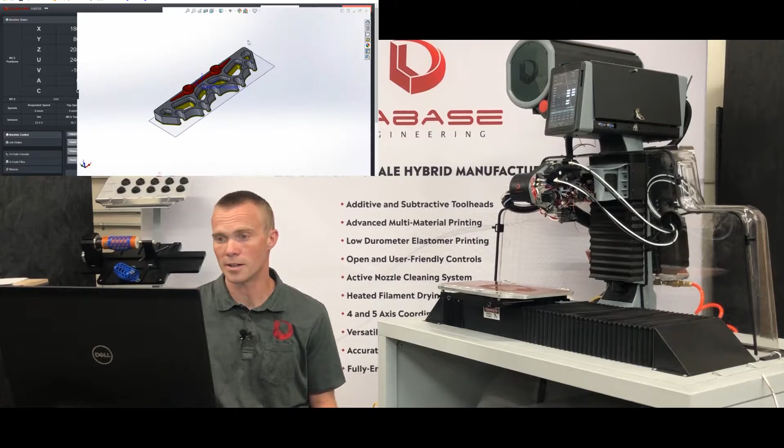So the machine's ready to go, but before we just load a multi-material print and hit go, there's a whole lot we have to talk about, starting with our software toolchain. So generally, we're going to have our part in our modeling software. This is our normal starting point for really any build.

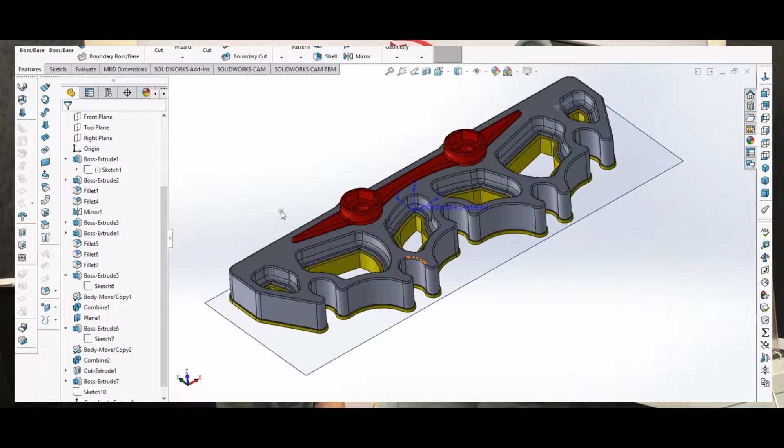So for this video, this is our end goal, to print this multi-material part. And this is just a flange that holds the arrows in my quiver. The old part was a little worn out and dry rotted, so I thought I'd print a new one and make use of it as an example build for this video.

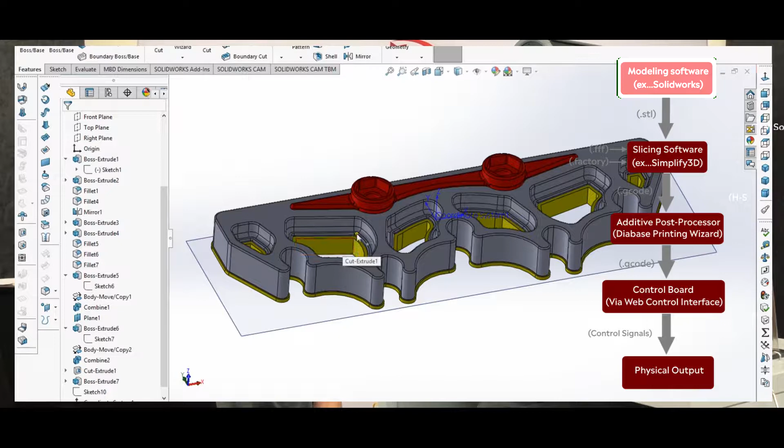So it's a 3-material print, but before we dive into the details here, let's just talk about the process that we're going to go through in order to get from this model to a physical object in our hand. So we're starting off here in the modeling software, and this is where we're going to define our coordinate system for the build, but it's also where we're going to define how the differing materials mate with each other and how they interface, whether they're just coincident or whether there's some overlap.

So we define our model geometry here, and then we'll export an STL into our slicing software. So in this case, Simplify3D, and I don't have the model in yet. We'll walk through that process. But this is where we're going to define most of the

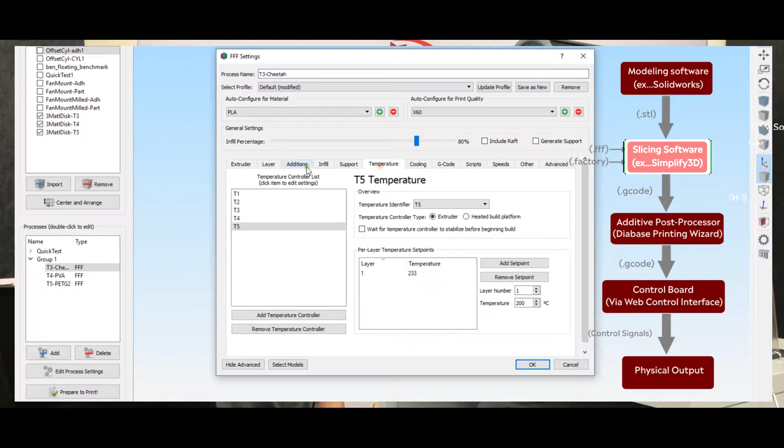parameters of our process. So everything from our nozzle diameter to our extrusion width, our temperatures, our layer heights, the scripts, these custom scripts that we send to the machine in order to get it to do some special things that we want. Our speeds, all of these things will be done in the slicing software, and then from there we'll export our G-code and then go to our post-processor.

So this is the Diabase printing wizard, and this is a piece of software that just combs through that G-code and makes some changes to it that are specific to the needs of the H-Series machine. And it also gives us a few more knobs to turn, a few more parameters that we can change that Simplify doesn't allow. So from here, we'll process the file, output another G-code file, and then send that to our machine. But we're not done at that point.

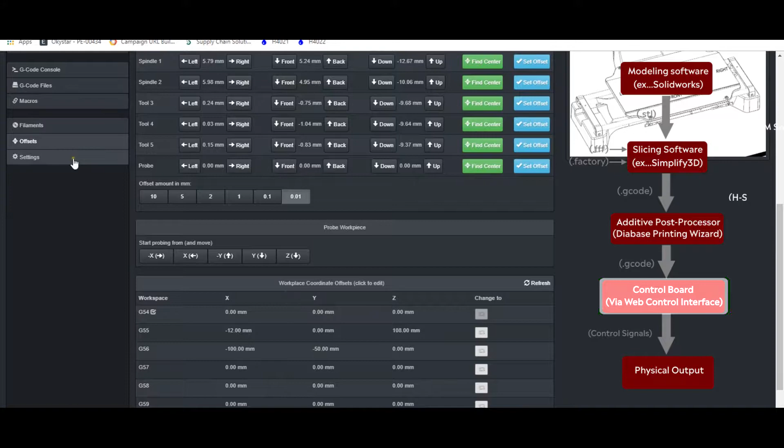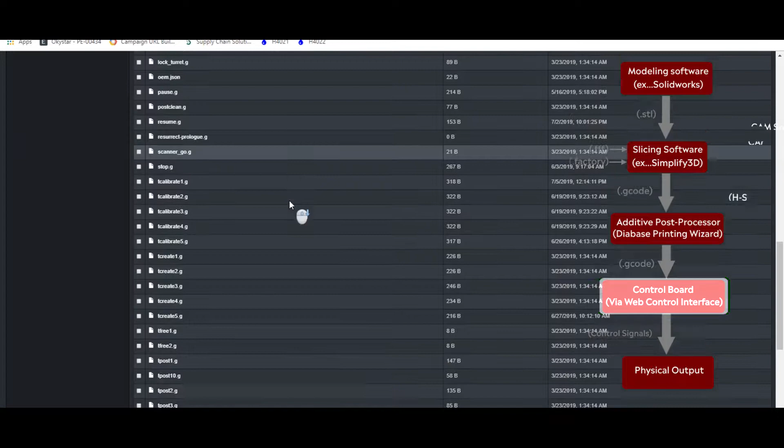So we can load the file into our controller, but before we hit go, there are a lot of definitions that we need to make here in our software. So from our offsets to our system files, these are all the files that the machine uses when it's interpreting the G-code that we've sent it. So for things like the tool changes, the timing of the prime cycle and of the cleaning and retraction settings, all those things can be modified in here as well.

So we have all of these knobs to turn, and we're not going to go through all of them in this video, but we'll try to go through the major ones that will get you going on multi-material prints. So we're going to take a few steps to get to our multi-material print. We're going to start by doing a single material print with each of the specific tool heads and materials we're going to use for that multi-material print, but just one at a time.

A surefire way to get frustrated with multi-material printing is by just launching into it and not having your settings dialed in for each of the tool heads and each of the materials. After that, we'll do a simple multi-material print that's just a series of concentric cylinders, and at that point we'll dial in our tool change settings.

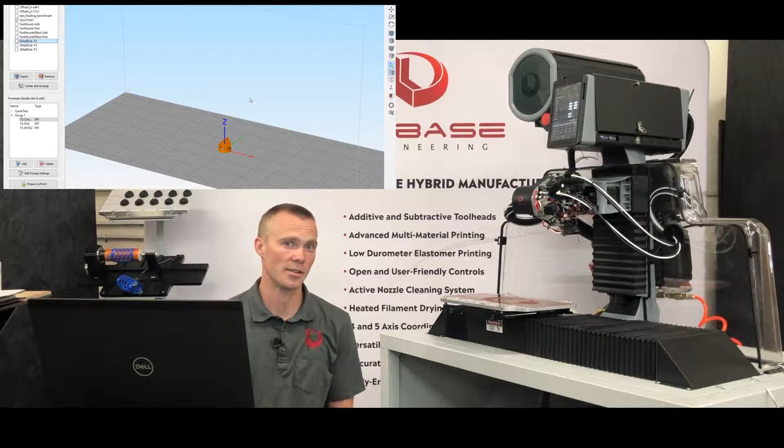So that's our timing, our retraction settings, those sorts of things. And we can also double check with those concentric cylinders that our tool offsets are correctly set. And then at that point we'll start to look at doing the actual multi-material print that is our goal.

So to start with, we need to decide what materials we're going to use and choose which tool heads we're going to put them in our machine. So for this part, I want this region, this component here, to be quite flexible. So I'm going to use Cheetah, which is a 95A-ish TPU.

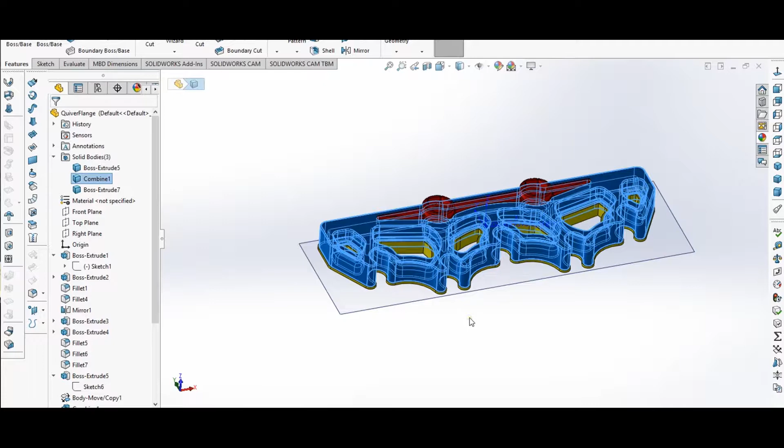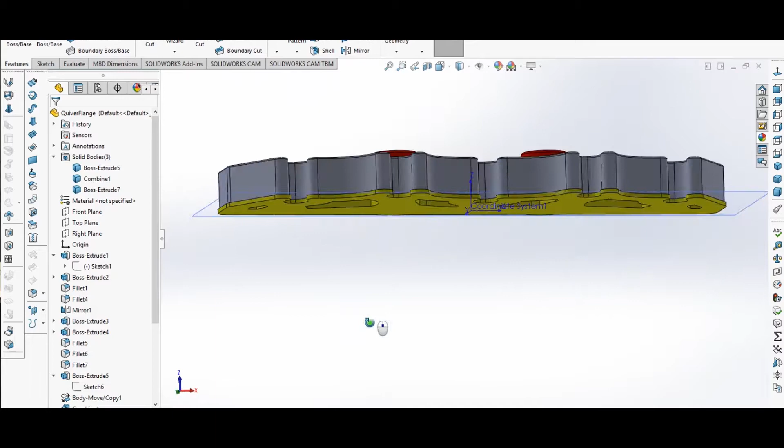And then for this component here, this is a rigid section that's meant to stiffen the back portion of the part. I'm going to use PETG for that. And then this yellow section here is just support material that I'm going to use PVA for. So those are my materials.

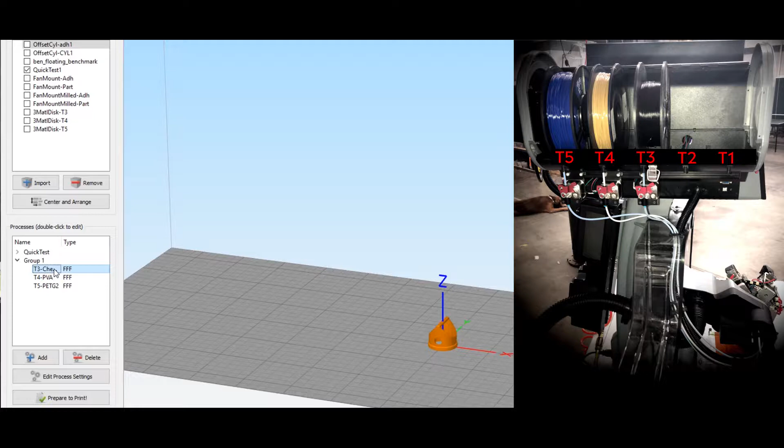And going back to Simplify 3D, I need to decide which tool heads to use them in. And thinking about the H-series machine, I'm going to use the softest material, the most tacky material in T3, because that has the shortest path from the filament cabinet down to the print head. Now, on this machine, I actually have Filament Assist installed, so it doesn't really matter. But for those of you that don't have it, you'll want to typically use your TPUs in Tool 3.

And then PVA I'll use in Tool 4. These two I have standard hot ends installed. In T5 I have an HT hot end installed. So T5 is going to be PETG, T4 PVA, T3 Cheetah.

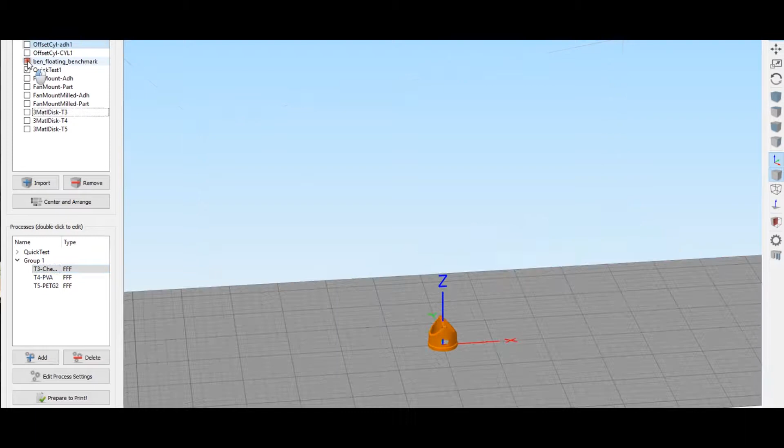Now when we're choosing the model to do our single material print in order to dial in our settings, we want to choose something that has difficult features so we can actually see if our print settings are good. So we could use something like this, which is a little toy boat that a lot of people use to benchmark 3D printers. And I use this to confirm my settings for PETG. But I'm not going to use it for the other materials because it takes quite a bit of time and it's a little bit of overkill as well.

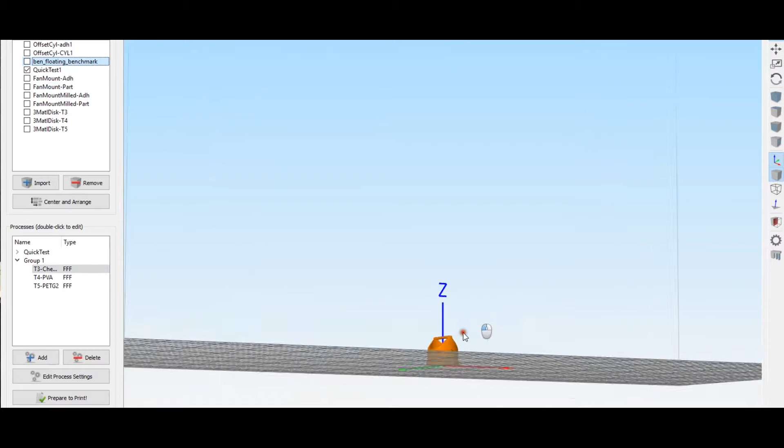So what we'll use instead is this part. It has a few thin walls that will show us if our retraction settings are good and our layer changes work well. And then it has a hole there that will show us if we have problems with curl. And then that feature across the top will show us if we have problems with bridging. Then this little jog out the back will show any trouble with ringing.

So I actually already printed this part with Tool 4 and Tool 5. So those guys are already dialed in, but we'll walk through dialing in Tool 3, which is our TPU. So let's talk a little bit about the different settings that I have defined for these different materials. So over here in my processes window, I have this group 1 defined.

Now, grouping in Simplify 3D is a topic of its own. It is very important for multi-material printing, so it's worth taking some time to understand. The basics are any parameters that are the same in multiple processes, when you group them, will change together. So when you make a change to a parameter in one process, it will update in the other.

So say I double click here on my T3 process and go to my layer height. I have that set at 0.15. And if I check T4, my layer height is also set to 0.15. And that was the case when I grouped these processes. So now if I were to change that to 0.2 and save it, now I look at my layer height in my T3 process, that also changed to 0.2.

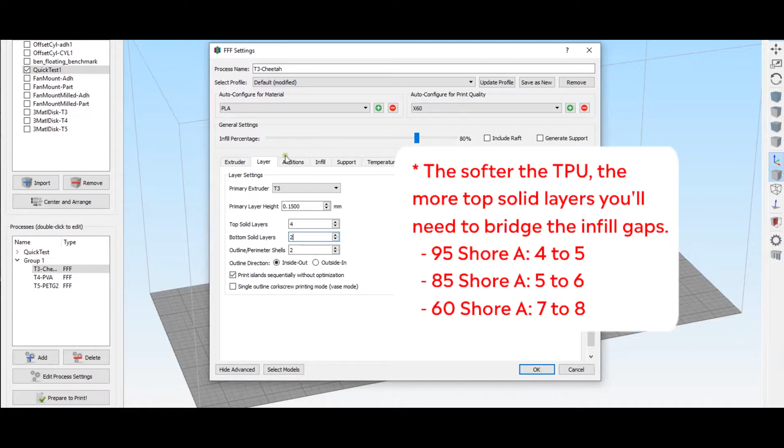So then for my layer height, I have 0.15 set. Top solid layers is a very important one for TPUs. I have that set to 4. Bottom solid layers to 2, that's fine. Then since we're using a prime cycle, we don't need to do a skirt or a brim to make sure that the nozzle is primed. We definitely don't need to use a prime pillar or an ooze shield.

Then our infill, we want to make sure that we have the same extruder set for our infill as our other features. The infill pattern, rectilinear is fine in this case. Infill percentage, 80% means that this portion of the part, so this is the rubbery portion of my clamp, and I want it to be pretty durable, tough, and fairly rigid for the stiffness of the TPU, so 80% will be fine there.

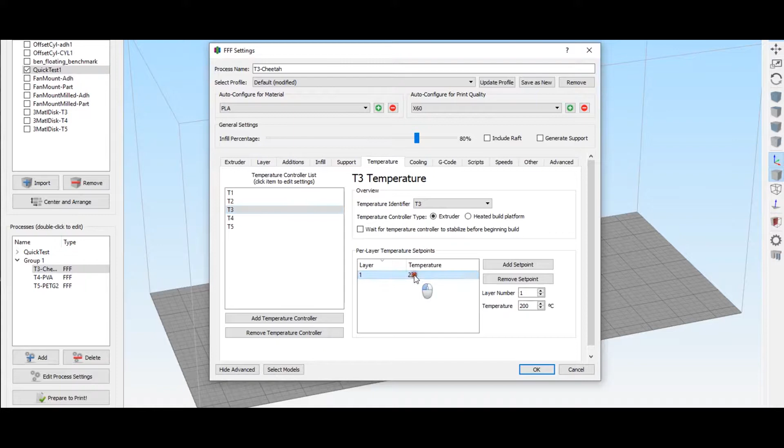So infill extrusion width is another one that can be very useful with TPUs, especially if you're doing low fill percentage. It can help to bridge those low infill gaps. Let's see. No support material needed on this. Then temperature, of course, is another key factor. So in this case, for T3, I'm going to use 233C for my TPU.

Cooling, I do have cooling fans that I set up on these extruders, but I have them currently wired directly into my extruder cooling fan, so I don't need to control the speed right now. In a later video, we'll show you how to set those up to your actual cooling fan lines.

So our scripts, this is where we can send custom code to our printer at, say, the start of the print, the end of the print, or at layer changes, tool changes. This is extremely useful, but it also requires that you learn some G-code and understand how the H-series responds to the G-code that you'll put in here. So now, there are a few things that I've added to these scripts that would not be in the standard factory file that we sent out with the machines.

One of them is this line here. This defines the motor current percentage for the extruders and filament assist. So this 65 here, this last value, I'm setting the motor current percentage lower than it is set in the firmware. So there's the actual motor current that's defined in a configuration file in the firmware, which I can show you later. But then we can also define temporarily a percentage of that motor current to send to the motors. And that's what I'm doing here. I'm setting it at 65%.

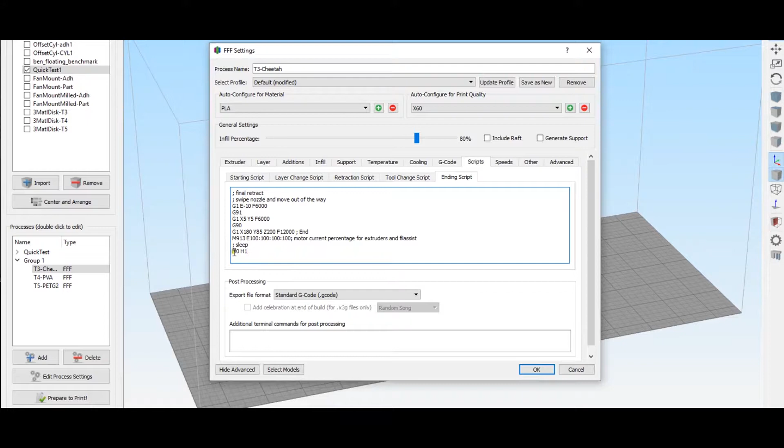And then our printing speeds. So when you're doing multi-material prints, you do often have to run slower than with single material prints because you're trying to ensure a good bond between differing materials, where the adhesion between those materials often isn't as good as the adhesion of the material to itself. Let's see. Tool change retraction will be very important for multi-material prints, but we won't spend a lot of time on it just yet.

For print quality, there are a couple settings here that can be important. So if you have minimum travel for a retraction set, then any travel moves that are smaller than this value, the machine won't do a retraction move for. It'll just quickly move the print head over. So especially for TPUs, that can cause problems. You can get a lot of stringing, but it can be very useful for increasing your print speeds. If you have long retraction moves, that takes time. Every time you do a travel move, if you do retraction, you're adding time to your print.

And then forced retraction between layers, it's a similar situation. You can get little zits on your print that come from material oozing just in the time that it takes for the machine to move from one layer height to the next, especially if, back in your layer tab, you have this use random start points for all perimeters. That means that it's not just going to start and stop at the same point. When it does that layer change move, it's going to move to another point on the print. So whether or not you use retraction for that will be defined by those two checkboxes.

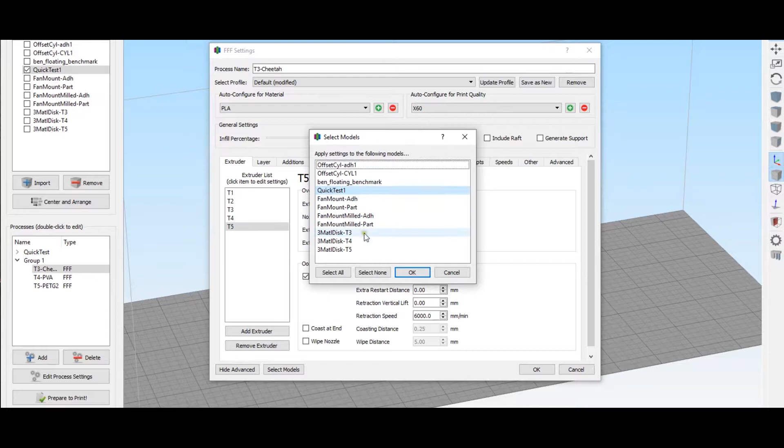So since we're just doing a single material print, we need to just select the one process that we're going to use, then go to Select Models. I have the model already selected here as quick test. We want to make sure that you don't have any other models selected by accident. Say OK, prepare to print. So our process is already selected there. Save toolpaths, quick test T3.

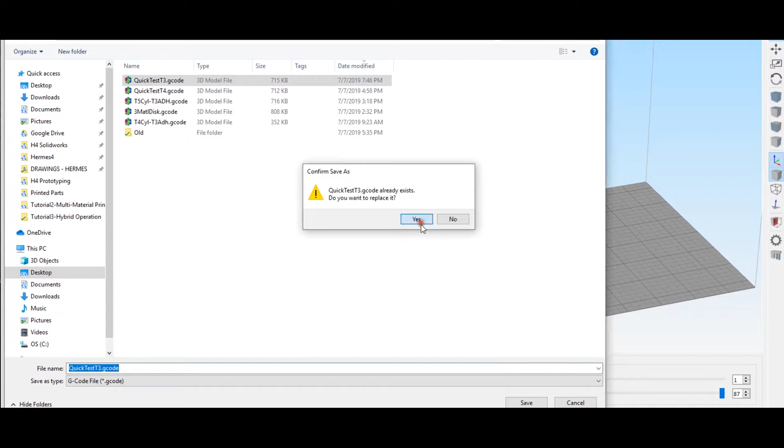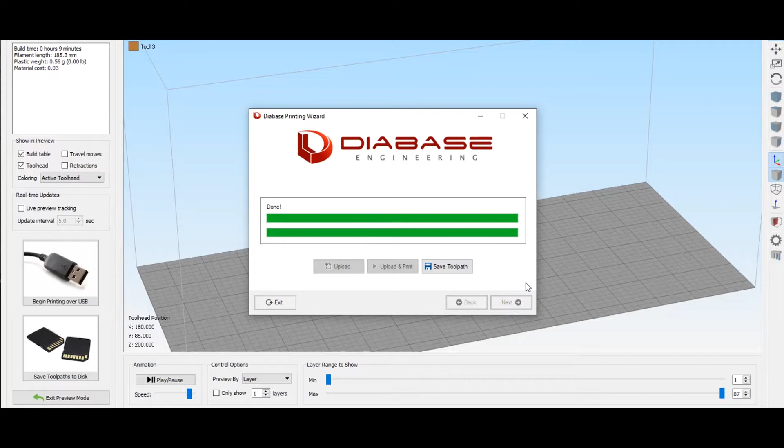Yes. Now we'll open our Diabase postprocessor and say we're only using T3, so that's the one we want our auto clean checkbox selected. We can allow these other ones to be at their standby temperature. That's fine. Now we go here to select the file for post-processing. Next. And just skip through this right now. I'll tell you more about this the next time we go through it for a multi-material print. Overwrite the old file, yes.

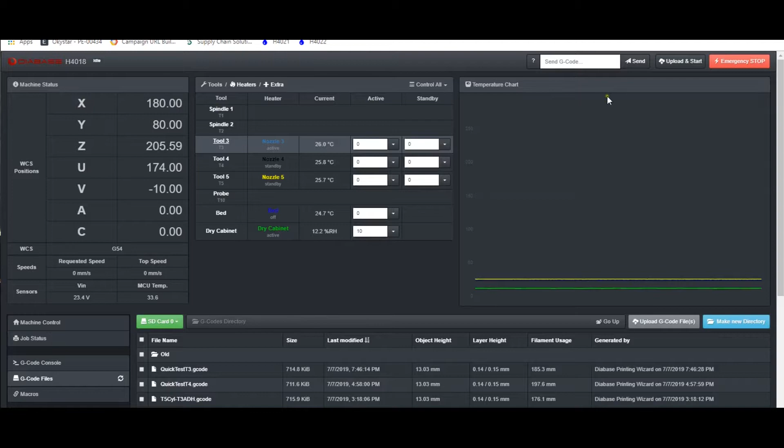Then we'll go to our machine controller and say upload and start. Select our G-code, say OK. And now the machine will just start without any confirmation. So if we had gone to our G-code files and uploaded the G-code file here, then we would have had to go find that G-code file and click Start Print here. So that print is now starting.

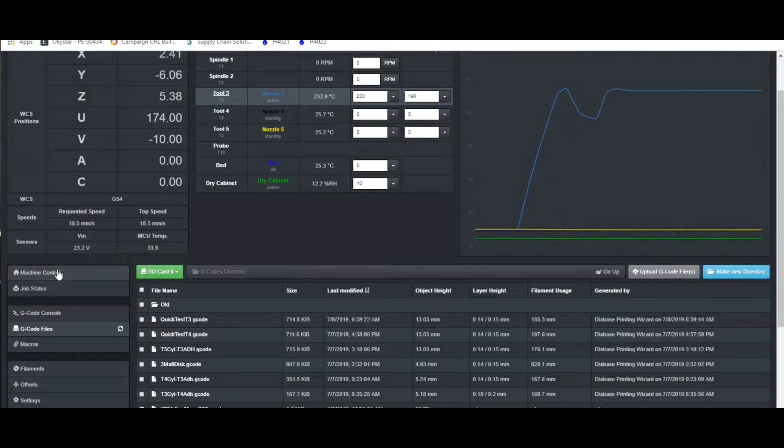There are multiple things we can talk about here. So on the left-hand side here, we have these different tabs. The machine control tab has our jog buttons and our extrude and retract buttons for loading and unloading filament, that sort of thing. And then the next one down is our job status. So that's where we'll typically want to be when we start a print, because there are a few things that are very useful here.

If we started a print and didn't have our nozzle offset perfectly defined, we could use these baby stepping buttons to jog the machine up or down during the print in order to get it to the right height. Now, at the end of that print, you want to go and recheck your nozzle offset and get rid of this baby stepping. You don't want to rely too heavily on baby stepping in order to get your print adhering well to the bed, especially if you're planning on doing multi-material prints.

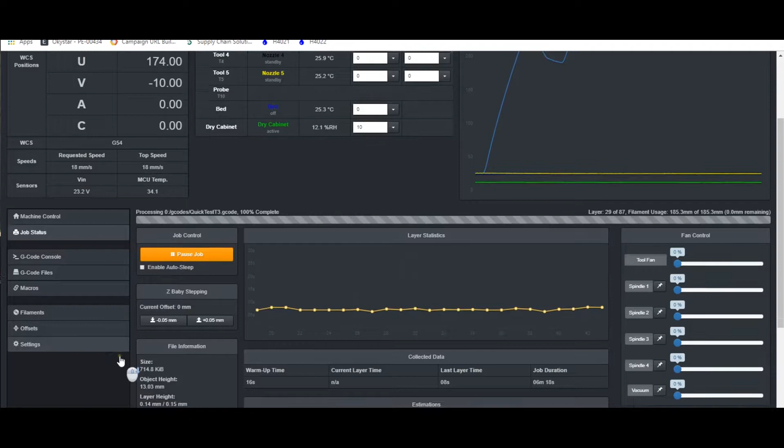This is also where we can change our speed factor, so we can adjust the speed during a print, and then the same thing with extrusion factors. Right now, the extruder labels aren't all that intuitive. For machines with 3 print heads installed and 2 spindles, that's a pretty standard configuration for machines that we're sending out. Tools 1 and 2 are your spindles, and then tools 3 through 5 are your extruders.

So here, these extrusion factors just count up from 0. So extruder 0 is your first extruder. So in our case, that's tool 3. Extruder 1 is tool 4. Extruder 2 is tool 5. And then extruder 3 is your filament assist multiplier.

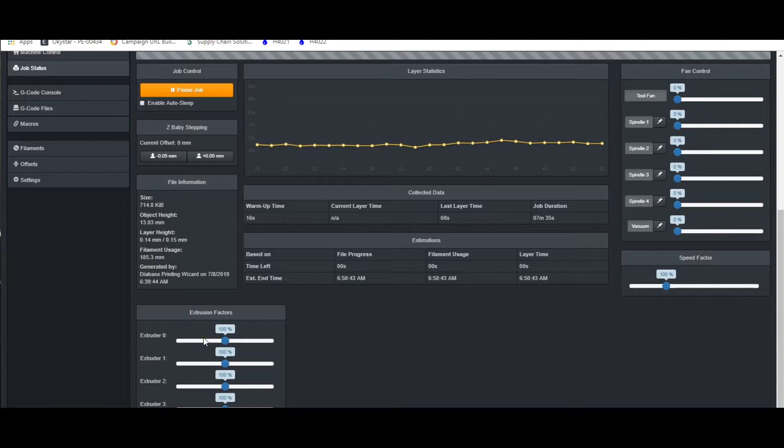Now, we'll give you updates as we make improvements to the firmware. But right now, that's how you'll have to remember it. They just count up from the lowest number extruder that you have. If you had tools 1 through 5, extruder 0 would actually be tool 1. So it's a little bit confusing, but we'll improve that as we go.

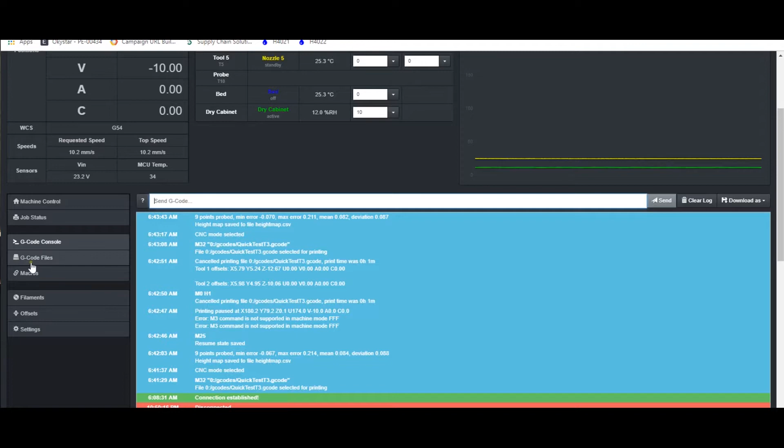GCode Console is where we can type in G-code and send it directly to the machine. We definitely don't want to do that while it's printing. It will respond to G-code that we send. But there are times when sending commands from this area of the controller is very useful. Our GCode files here, that's pretty self-explanatory.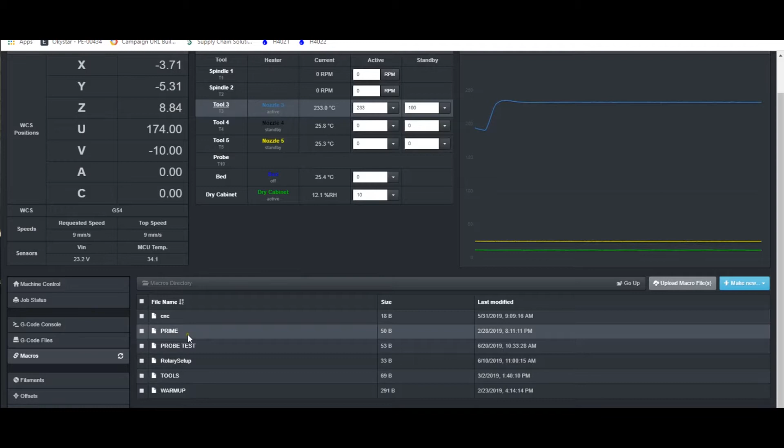Macros, these can be extremely useful. The machine typically comes with a few macros loaded on it. This prime function will prime all the extruders. This warm-up macro is useful when you haven't run the machine for a while. If the machine's been sitting, the bearing seals can get a little bit sticky, so it's a good idea to run this before you run your file.

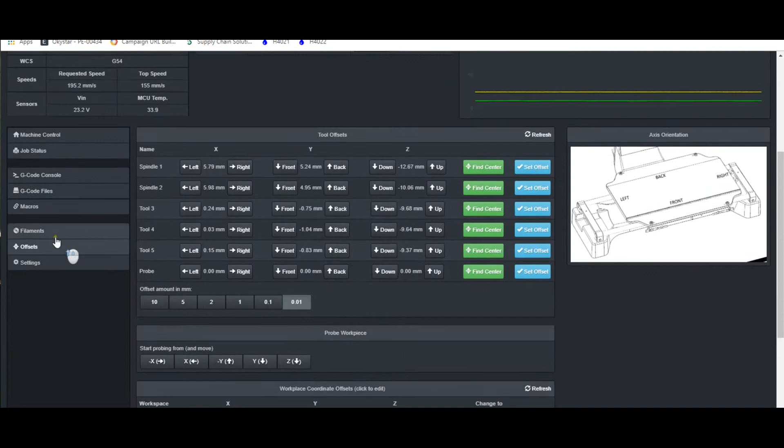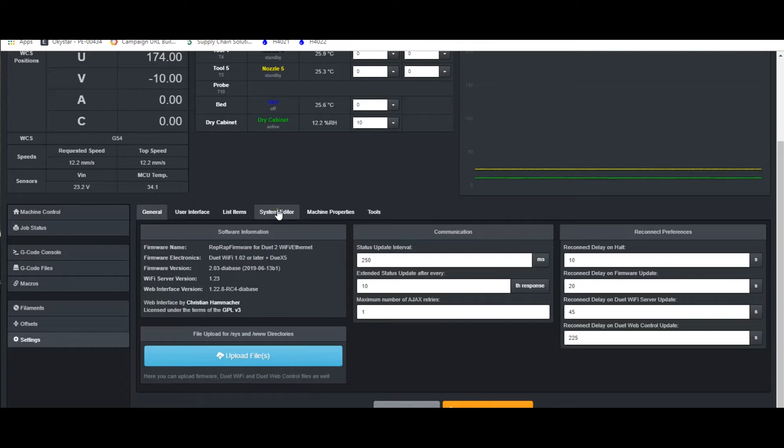And our offsets page, we already talked a little bit about this in tutorial 1, so we won't go through it now. And then settings. So here's where you'll interact with the firmware of the machine. So when you go to update your firmware or to load new files that we send you, you'll do it through this dialog here. Now, under this System Editor tab, this is where all of the system files for the machine are stored, and where we actually will make some modifications to get the machine dialed in for multi-material prints.

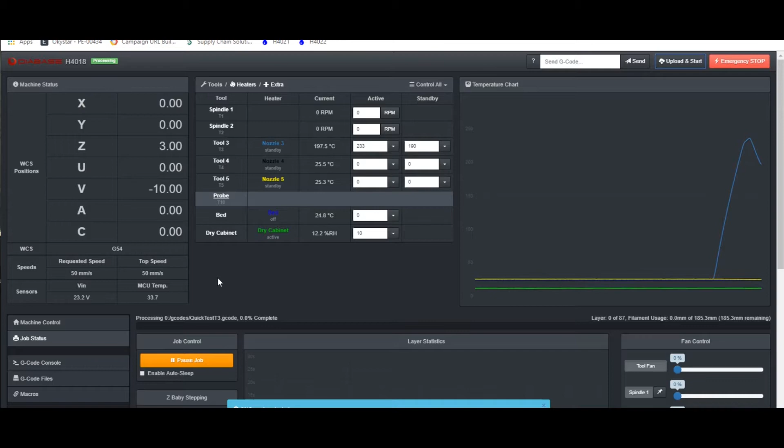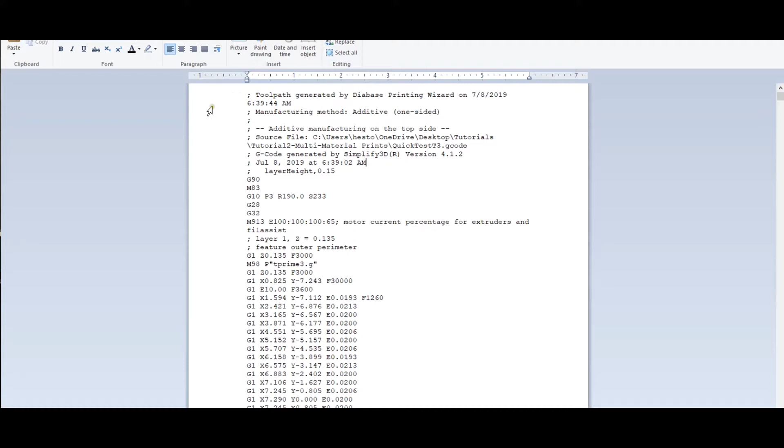So to start with, the machine's going to come down and probe the bed, and it's going to do that because of what we have in our G-code. So let's look at this G-code file. Let's look at it from our directory so that we're not opening the file that the machine's actually running. So this is the code that was output by the Diabase postprocessor. And at the top, you can see we have some statistics about the file. And then if we scroll down near the top of the code, you can see a couple commands here.

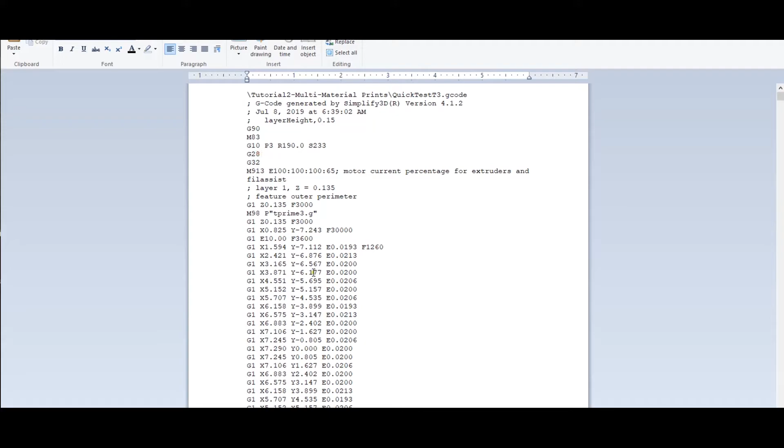This G28 is a home all command. And then this G32 is a probe Z and calculate Z plane command. So let's go back to the controller and then come down to our settings tab. And then within settings, let's go to System Editor. So this is where all of the system files are stored for the machine. So these are the files that the machine uses to interpret the G-code that we're sending it from Simplify 3D and from our postprocessor.

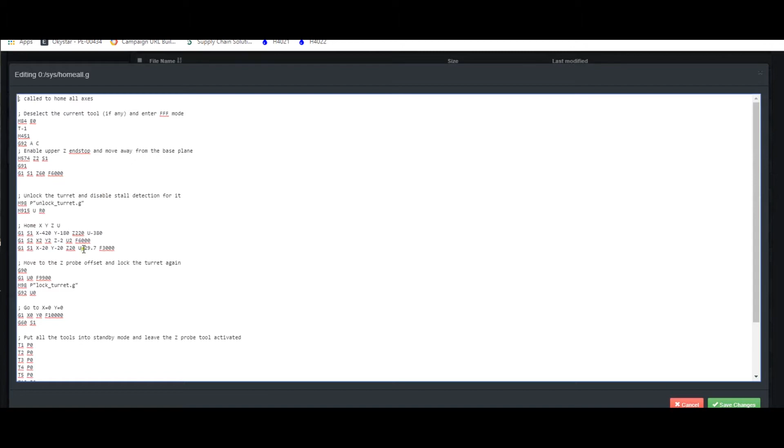So when we ran that G28 command, that's our home all command. So that causes the firmware to run this homeall.g file. So if we look inside there, this code is what the machine will do when it sees that G28 command. And that G32 command will cause the machine to run this bed.g file. And in this case, we have the machine configured to probe the bed at 9 points. Now, this doesn't mean anything to the machine. It's just a comment for the sake of the user.

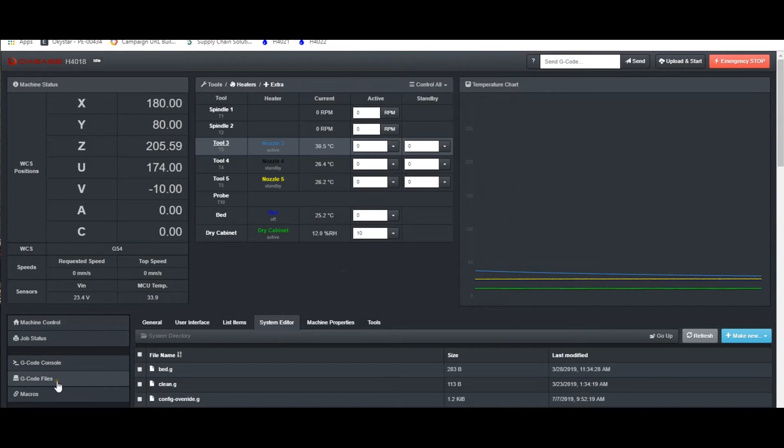So in this case, though, let's just go to upload this GCode file directly and not say upload and start. And then let's go into our settings and change that bed.g file. So I'm going to just copy this line and then comment this out. So that semicolon just means that the machine's going to ignore that portion of code.

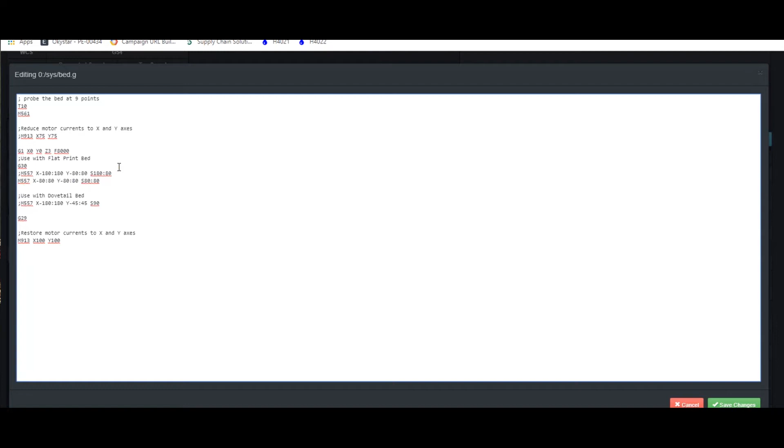And I'm going to define this as -80, 80, and this guy 80. So that should probe a square print region instead of the entire bed. So say save changes. I will go back to our GCode files and say run, yes. So again, that G28 code will cause the machine to home all the axes, and now it'll come down, probe one point in the center of the bed, and then it'll probe the grid that we defined.

Okay, that print finished, and it looks like the changes that we made had a good effect, but we're still not quite there. We still have some defects, especially on the inside surface where we're making our layer changes. So let's go back to our T3 process, and let's come down to this checkbox here, coast at end. So what this does is it causes the extruder to stop pushing filament a small distance before the end of the trace that it's printing.

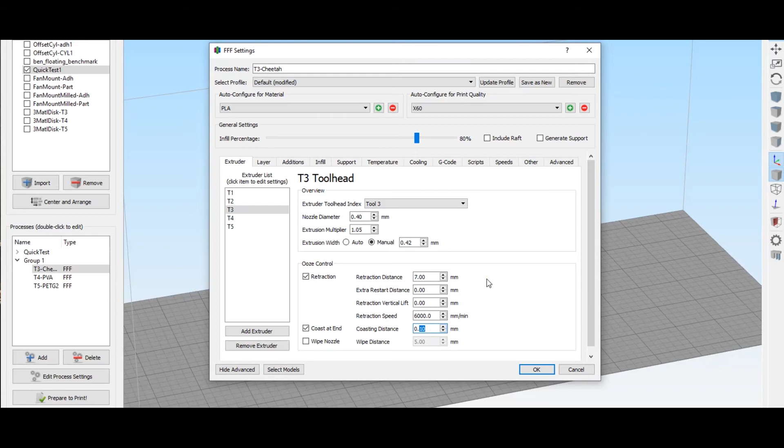And with TPUs and other amorphous materials, this can be helpful to relieve the pressure before the end of the trace. Sometimes when you're doing layer changes and you're getting these little zits on the outside of your part, this function can help relieve that. So let's try 0.5 millimeters for it and run another print.

All right, that print finished, and I'm pretty happy with the result. So I'm going to come into Simplify, and the first thing I'm going to do is save this factory file. So save factory file as 3 material factory. That's fine. I'll just overwrite the one that I already have. But then I'm also going to come in here and save these processes as profiles. So I'm going to save as new T3-cheetah, same name as my process. I'll do the same thing here for PVA.

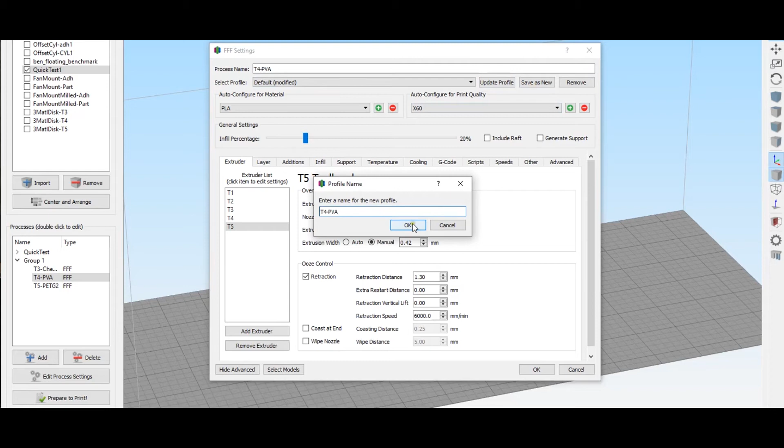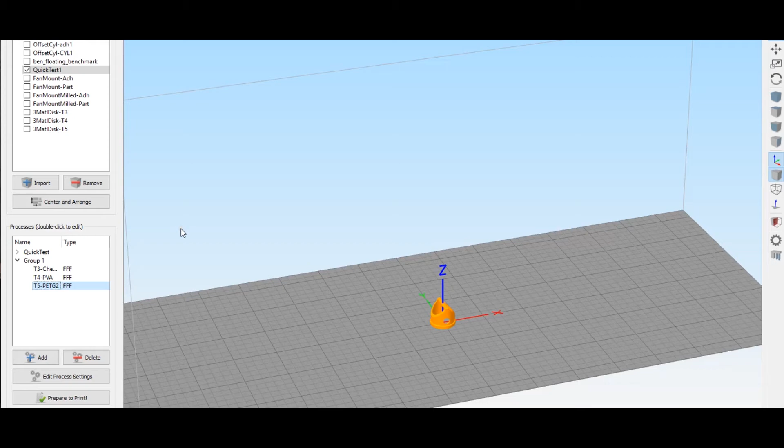And I'm doing this in order to be able to use these processes in other factory files. So say I built a factory file with some other models, and I remembered that I had a process that worked really well with PETG. So then I can grab this FFF profile, import it into that other factory file, and make use of it there.

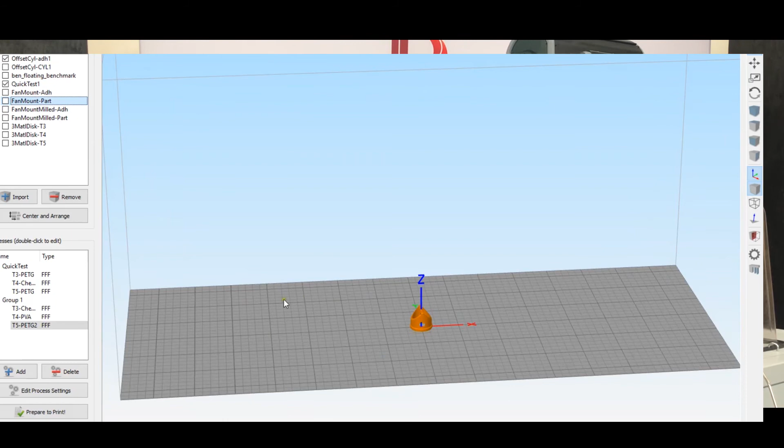So clearly it's not always that easy to dial in your print settings for a new material from scratch. So in order to do this more quickly and to not have to change your settings, print one part, then make modifications again, print another part, one way to deal with this is to print an array of parts with different processes all at once. So let me open another factory file here. So in this case, I have 15 parts here, and I've set up different processes for each of these.

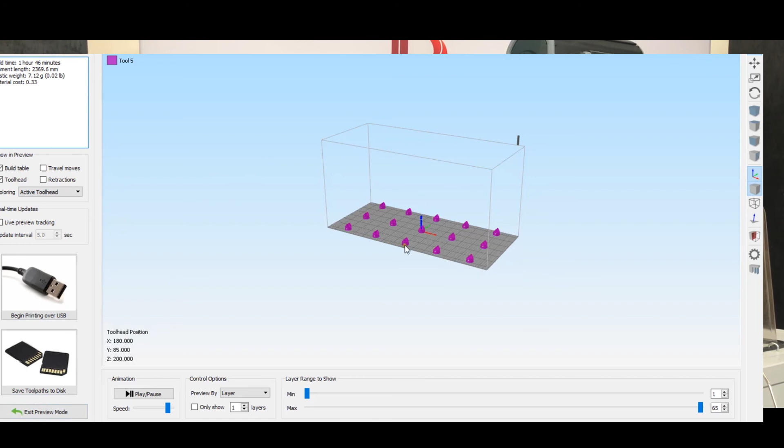So Simplify allows you to just come in here, take a process that you've already created, hit Control-C, Control-V, and you can copy that process, then make modifications to the settings of that process and select the particular model that you want. So when we're doing this, we want to be careful that when we output our code, so we say prepare to print, we have all those processes. It's going to select all these models. But rather than just printing that all at once, like I just did, we're going to say prepare to print, and then rather than saying continuous printing layer by layer, we're going to say sequential printing object by object.

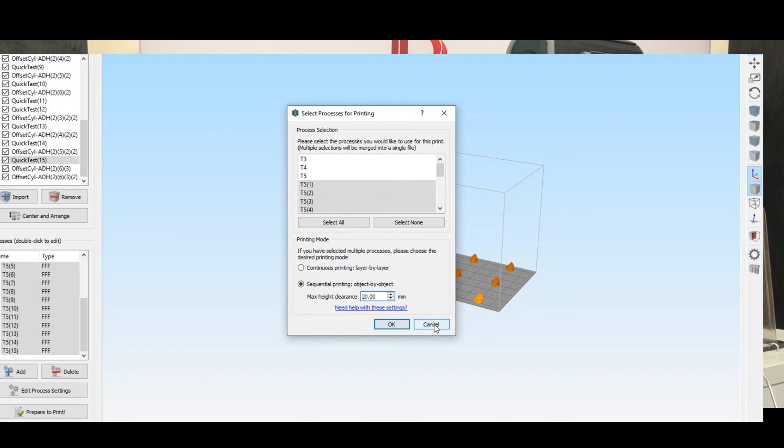Now, this max height clearance is just saying up to what height do you want to use sequential printing, and in this case, we just want to print the entire part, so 20 millimeters will be plenty of room for that. But we do need to be careful that we leave enough room between parts that the tool head doesn't collide with another part while it's printing one of them.

So that's a very useful way to dial in your settings, though, because you can make changes. Say you're not sure what direction to go with your retraction. So you had it set at 4, you wanted to try 3, 2, 1, and then up to, say, 10 millimeters of retraction. So you could do that across one row, and then try different temperature settings across another row, different layer heights even across another row.

So this way you can set the print up, let it run, come back, choose the part that looks the best, and then use that as your baseline to even run another array of parts. So this can save you a lot of time when you're starting from scratch with a new material.